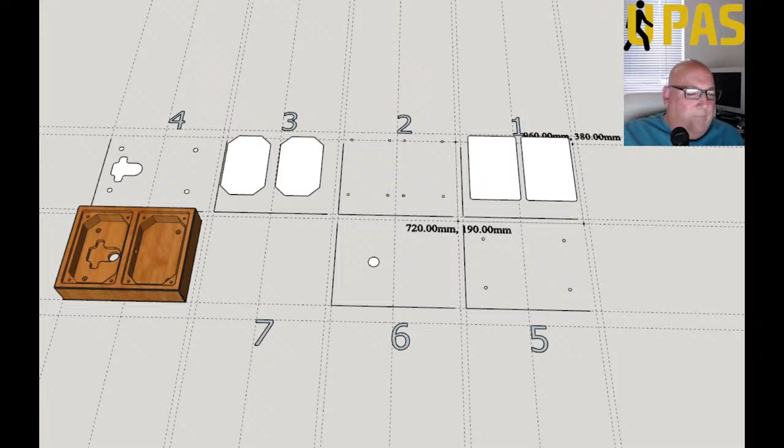Okay, yeah, so what we've got is we've done the cowl. I'll tell you what, let's go back and have a look at the quick cowl. Well, I can show you from here really.

So yeah, yesterday, or was it the day before - I think it was yesterday - I was gonna put a slot across here. I need to get the cables from here to here, so I was gonna put a slot. I did actually model in a slot with a bung. I didn't like it at all, so I've gone back to the other idea. So I've filled it back in, took the bung away, and just put a hole in. So it's just a hole there to send the cables from one to the other.

Didn't want to do it that way, because if I want to lift the lids out to have a look or modify, I can't take the whole thing out without unwiring some or part of it. But that's okay, that doesn't matter. Anyway, so it is what it is.

I got some screws today. What did I do with them? Yeah, a little bag of screws for the lid.

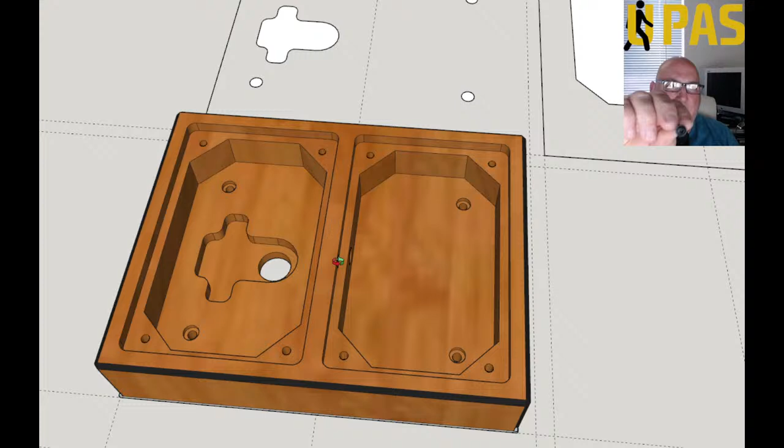Now these are just for the demonstration, the demo units, so I can set them up. They're just basically flathead screws. What it is, because I'm using black anodized aluminium, I think these will be quite nice, and they'll self-tap into the wood.

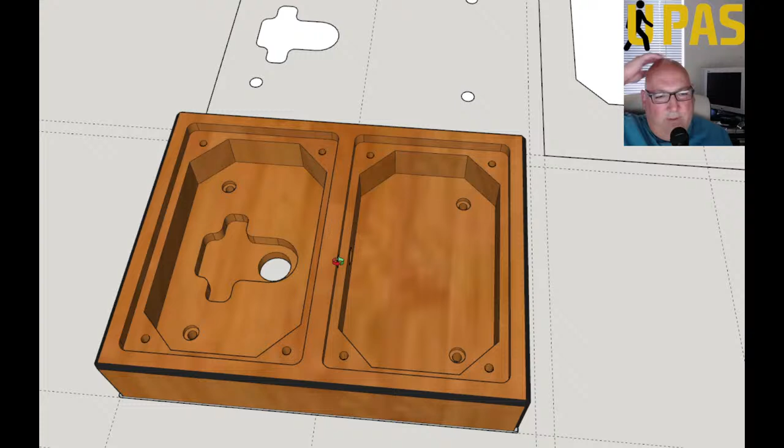So I'm going to use some of them. They're only black japanned, they will rust if they're outside, so it's only for the demo units really. I'll have to sort some better screws out ultimately.

Okay, so anyway, having pondered over it, I decided not to have the slot in there, because I'd have to create the slot, then I'd have to create the bung. It's more work really, a lot more work, and then I'd have to put a bend around here, put an arc around it.

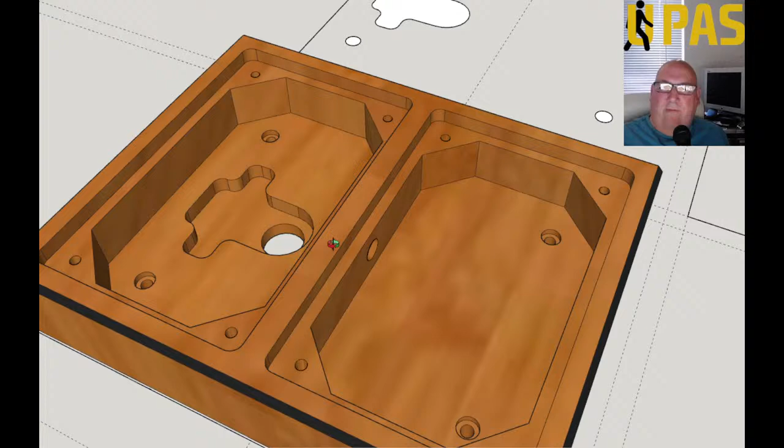Don't want a bevel on it at all, just sand around it, any splintery bits - hopefully there shouldn't be too many splintery bits. We've got to set the speeds for pocketing them out very low.

So what we've got here - don't know whether you used PhlatScript at all in the past. This is SketchUp, but it's got a Ruby module installed, PhlatScript.

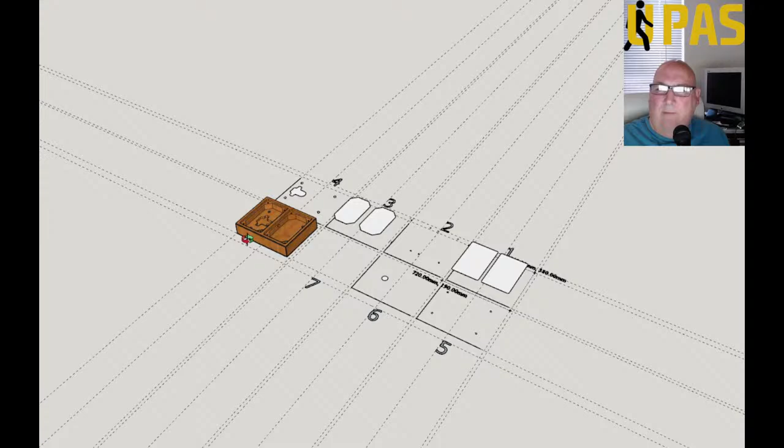So what I'm going to do is, what I've done is I've split up all this code, all these parts. So I started from the top, so basically copied and pasted.

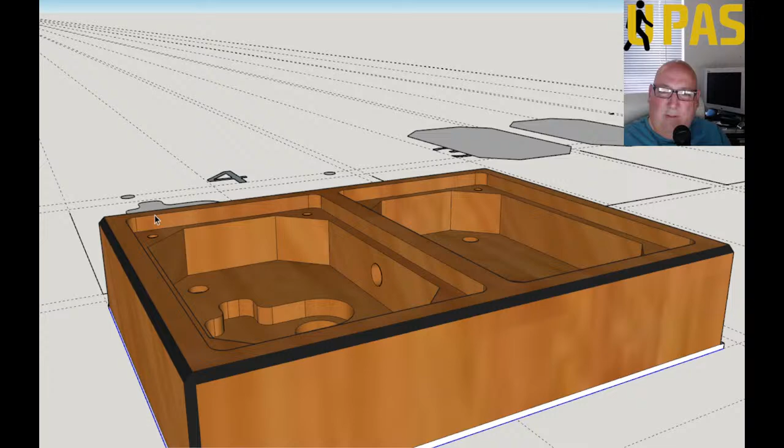So what I'd do is I'd go like this and I'd select, let's draw an extra line just to get it to line up. I need to move it, move the safe distance over with me. You won't know until I've started doing it. So the first thing we'd mill out once this is fastened down would be these pockets - so don't want that. So first select all these little... see, it's not coming out where it goes here. Hang on, there. Okay, there.

So I won't select them all. I'll just check, yeah, so I'll select the one. Normally I'd select that one as well. So then I'll do a copy, and then I'll just do a paste.

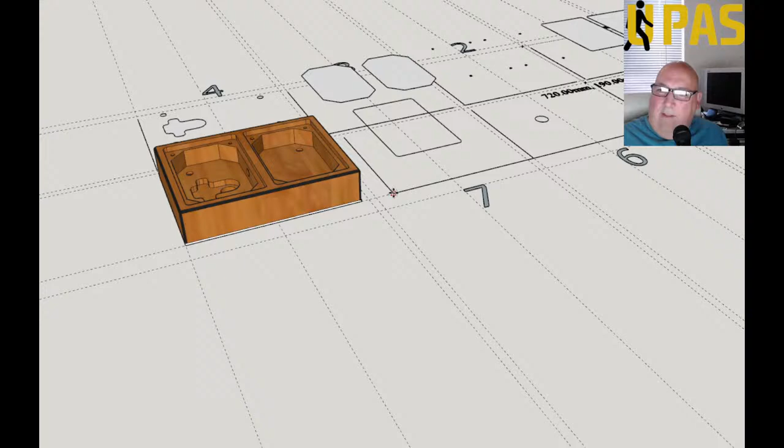Alright, so this is basically... I'd move it around. I could put it there actually. So I'd basically zoom in and I want it to snap to this grid here. See that grid? That's it, I've snapped it to the grid.

I'm not going to use this one. But basically my safe area, at the minute I've selected this one. You can see this has got a frame around it. If I select it again, let me select it again. So you can see that's bringing it in. So if I was to select it across...

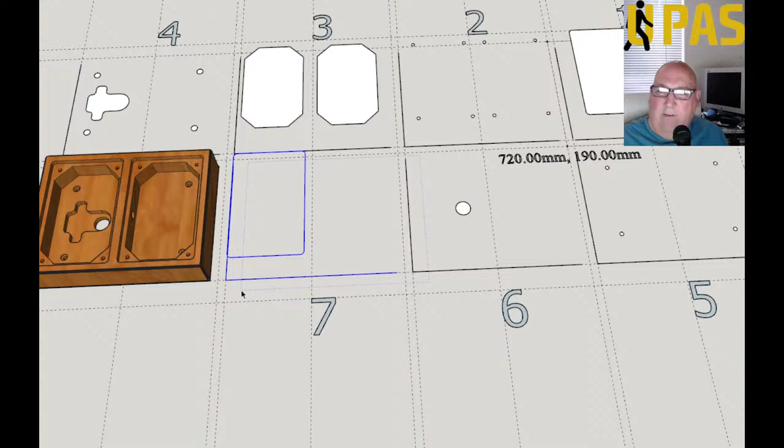What I've done is my origin is 10mm by 10mm. I think I've deleted one of the lines. Let me have a look, it's hard to see it.

Hang on, let's go on to view the axis. So I've already allowed 10mm from there to there. I've come across 10mm and up 10mm.

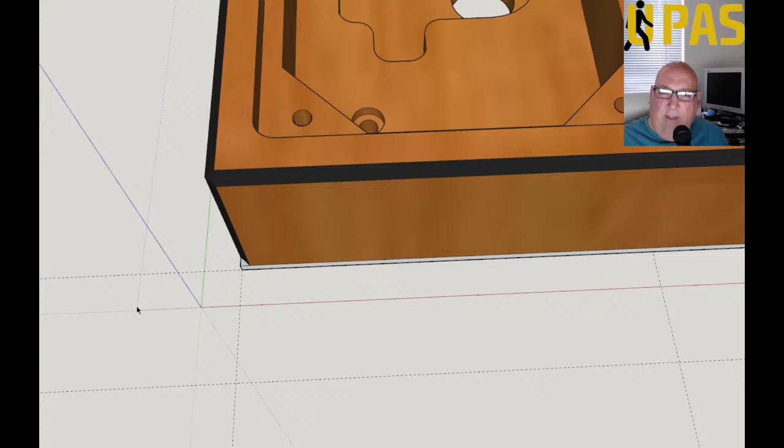Right, so the idea of that is so I can place... yeah, I've got to put... actually, let's stop that a minute.

So what I've got to do is I've lost one of my marker lines. Let's put another one in. So I'll go from there down 10mm to there. Okay, so I put this line in.

So I grab my safe area, this PhlatScript. You need to have a safe area, and it needs to... let me get rid of the axis now. So I want this safe area to start there at that point, 0, 0.

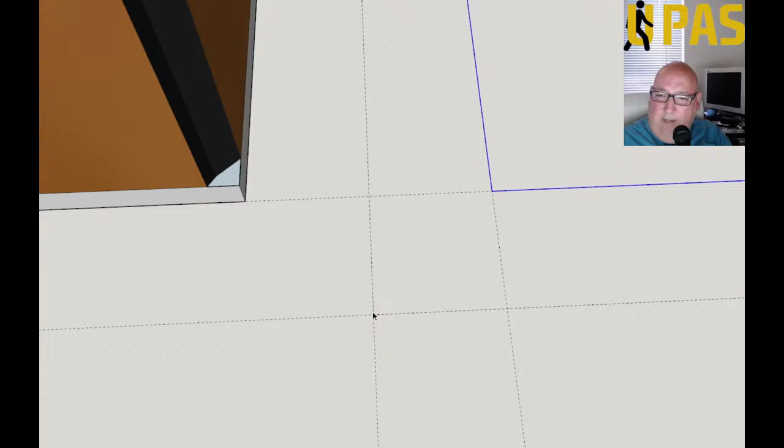Now, so the new safe area is this one here, which goes up to there and across and down. So it's 240 wide by 190 high.

So I need to generate some G code. What we're going to do is I need to fill this. You can't generate a G code otherwise. If I try to put a pocket, get the pocket symbol, and try to put it over it, it's not going to work, it'll go over there. It needs some fill in it, so it won't activate.

So the way I do it is I grab one of the flat bars, delete it, and put it back in again, like that, and you get fill.

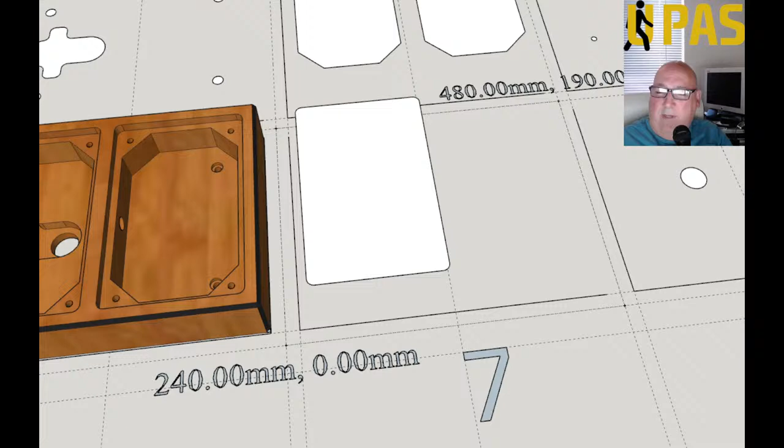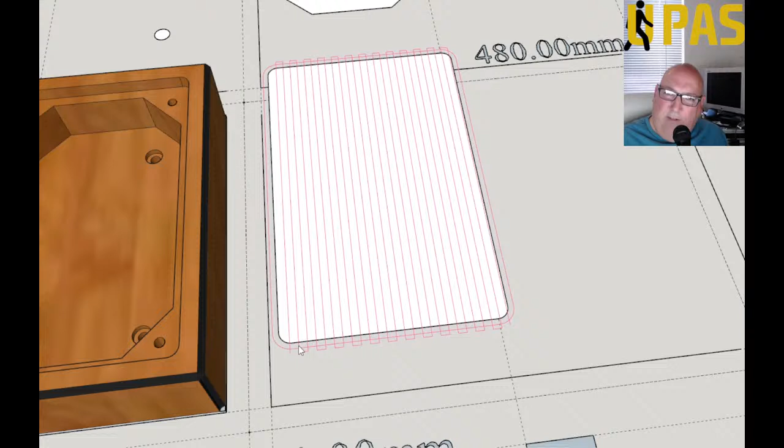Then I go and get my pocket tool, and I don't want that pocket tool - if I was to apply that pocket tool to this, I want to cut the area out inside, but this is the tool path, and what's going to happen is it's going to follow the outside of this path, so it's going to cut this too large.

I don't want the outside bit cutting, so what I'm going to do is cancel that tool, right click on it and reverse the face to get to that one, so I go and get the same tool back again, pocket tool, put it over the top. Now you see it's gone inside now.

So my milling bit is 5mm. So if I click that now, this is the tool path where the G-code is going to start, and it's going to go around like this. I think it's got 70% overlap, and it'll go down and it'll mill this, and it might do more than...

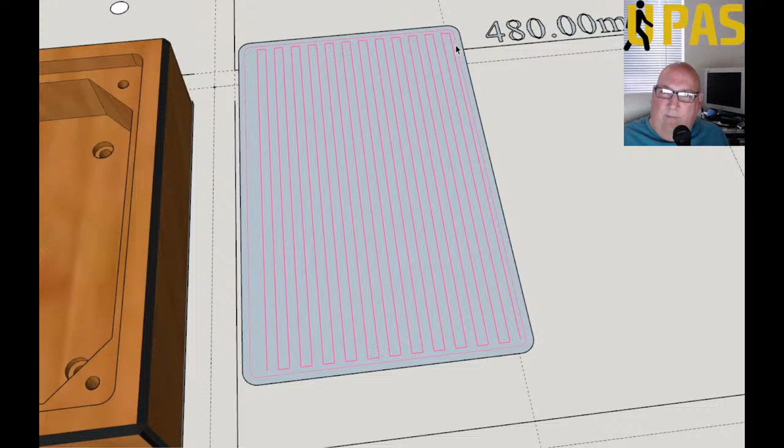What's it called? Hang on, let's have a look what they call it. Multi-pass depth, I've got to generate a multi-pass. I'm going to cut out the wood at 2mm a pass.

I've slowed the plunge rate down, and the spindle speed is set low. I've set the feed rate low, and I've got my bit diameter set to 5mm. Inside outside overcut is 100%. That might be too tight to fit, but we'll see.

I can leave this as it is, but when I generate the polycarbonate, I might need to make that slightly over 100%, so it allows a bit of play. We'll see - the only way you'll really know is when you come to try it, come to fit it into there.

Right, so you've got step over 70%. Okay, so what I've done, I've told it the material thickness is 14mm. Now the reason it's not really 14mm, it's 45mm, but I'm generating the G code for a certain part of it here, and what I'm trying to do is... this is 7mm.

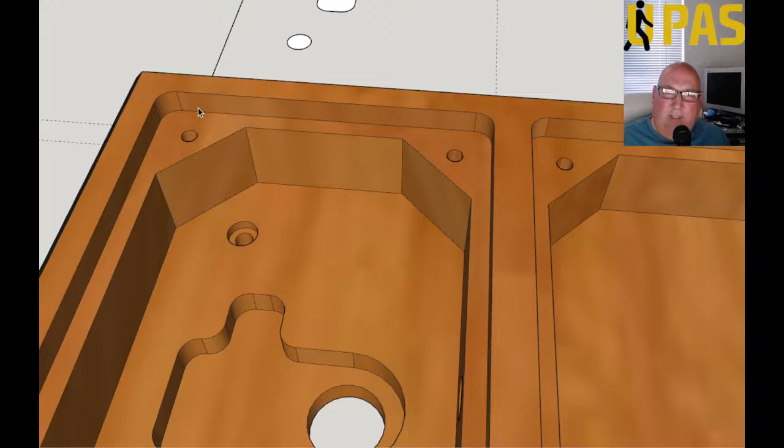If I was to measure that, if I zoom in there, so from there to there it's 7mm. Okay, so I want to mill just this 7mm. So how we do it with this pocket tool, it can't say 7mm, you have to say a percentage of the overall thickness. So I've fooled it into thinking that the material is 14mm thick.

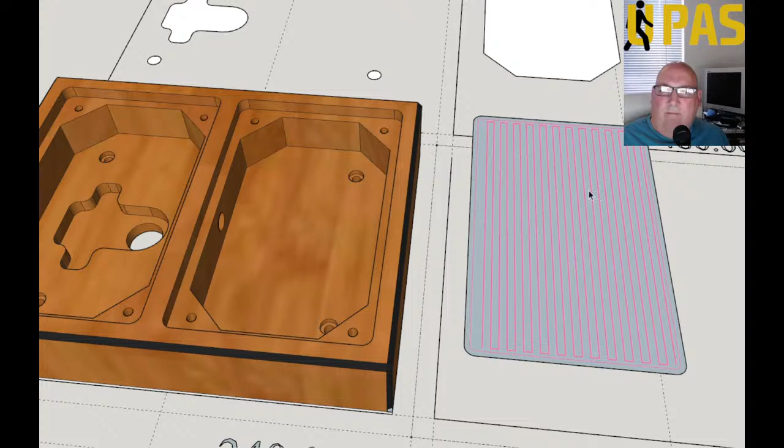So if I do 50% pocket, it should cut half the material, so 7mm. But you won't get it exactly right, I don't think you get it exactly right.

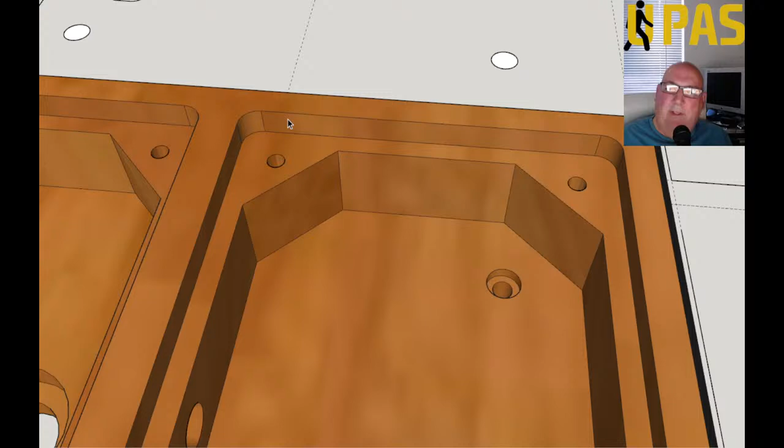It's a bit trial and error. If it's a milli or there, it doesn't matter, it just means put the lid on. If it's gone too deep, the aluminium plate will sit down a bit further. If it didn't pocket it enough, the aluminium plate will be sitting up. So I've allowed an extra 0.8 of a mil on top, basically so I can sand it flush.

Anyway, a lot of this won't make much sense unless you watch the other videos. So we've got this pocket here, and we've got this safe area. I'm going to save it, and I'm going to generate some G-code now.

We're not going to do anything with the G-code, we're just going to generate it. So, here we go. Generate PhlatBoyz G-code, I'm clicking on it. It's going to ask for a file name now, so I'll tell you what I'll call it: test, CNC cloud flattened, and then just test. Okay, here we go.

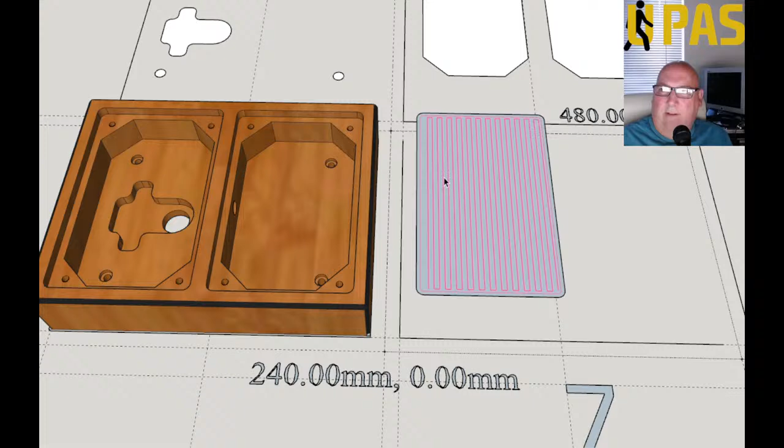So it's outputted a file. Now in a minute it should pop up a plot, it should show me a plot. I told it to show me the plot after. So where is it? Should be here in a minute. Took a while last time to show it. Unless I've unticked it, let me just check. Oh, just as soon as I knew that would happen - as soon as I clicked it, I knew it'd show me.

Right, so you can see that as well, can't you? Yeah, you can see it. Right, so it's good that it's put that there actually. I'm moving it around, but it's staying where it is - clever stuff. Anyway, so this is the tool path.

I'm going to use Mach 3 software on a Chinese CNC 6040, it's the ball screw CNC. I can cut with it something like about 585 millimeters by 395 millimeters. You're supposed to be able to cut 600 by 400, but you can't, because well, you can get close to it, but you've got to watch your stops - you don't drive your mechanism into the physical stop. So when you put limits on and that, you probably find you can't quite get there. But for the majority of the work I do, it's perfectly fine.

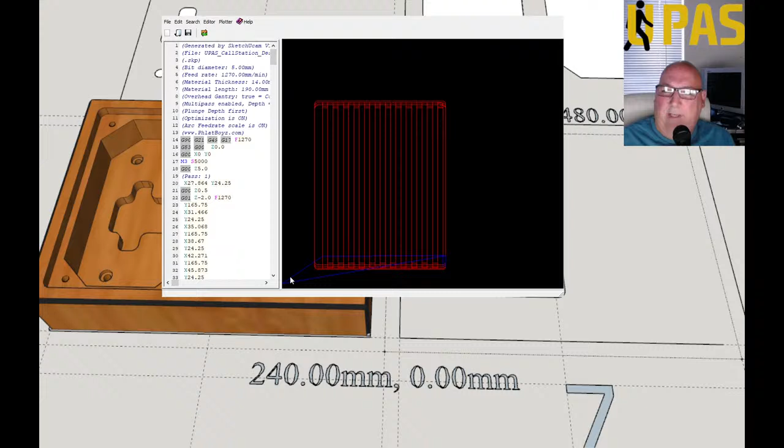So there's your G-code, that's your tool path. So you could save that now. We don't want that one to test, so I'm going to abandon that one.

And so as not to get this confused with the rest of it, I'm going to try and delete that. Can I do an undo? Undo properties, undo. Is it letting me? I don't know what it's doing, is it doing anything? Anyway, it's not really getting rid of it, so I'm going to have to get rid of this manually. So you can sort of tinker around with the toolpath if you want, but I don't really - I let it do the toolpath itself, so I don't want to upset it any.

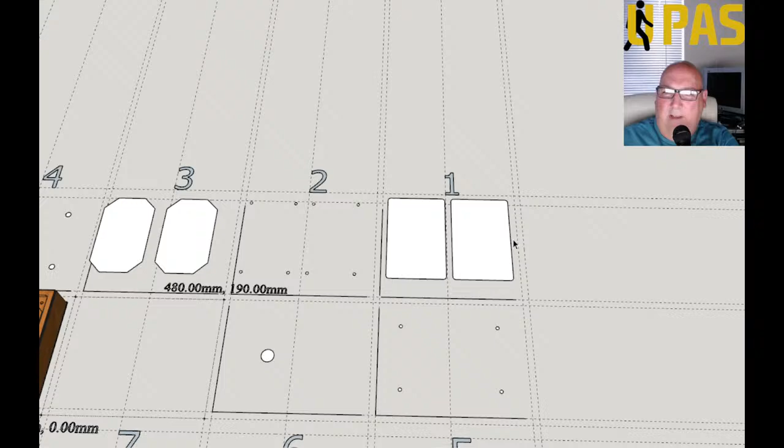Right, so I'm just getting rid of this off here. Okay, now the bits - I've already selected the bits, there they are. I've numbered them 1, 2, 3, 4, 5, 6 and 7. This is how many bits of G-code it's going to create. And you'll wonder how I'm going to line it all up - I'll show you as I do one.

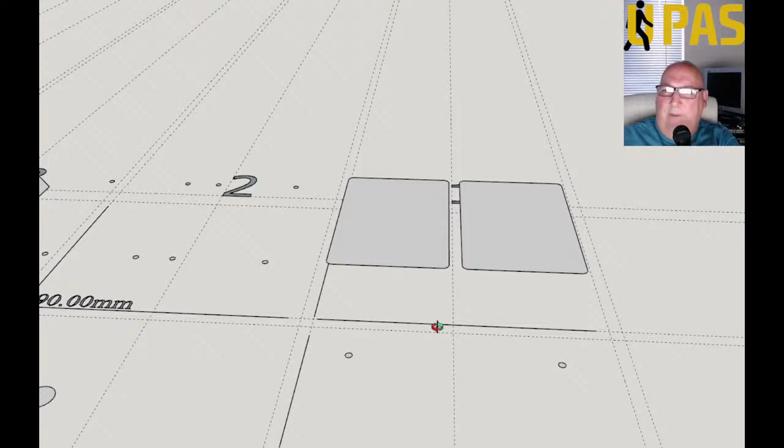Okay, right, so I've left these at the level that I've copied them off, so they're all at the correct level. Doesn't have to be, you can put it flat. So I've already filled these out, so I need to create a pocket. So I go into the pocket tool.

I'm just gonna - again, I've got the wrong way around here. If I did it like that, the tool path would go over the edge and it wouldn't make the exact size I'm after. So I'm gonna have to flip, reverse the faces. This is just the way the PhlatScript does it - if you want to go inside pocket, you have to reverse the face. I'll do that one, I'll do that one.

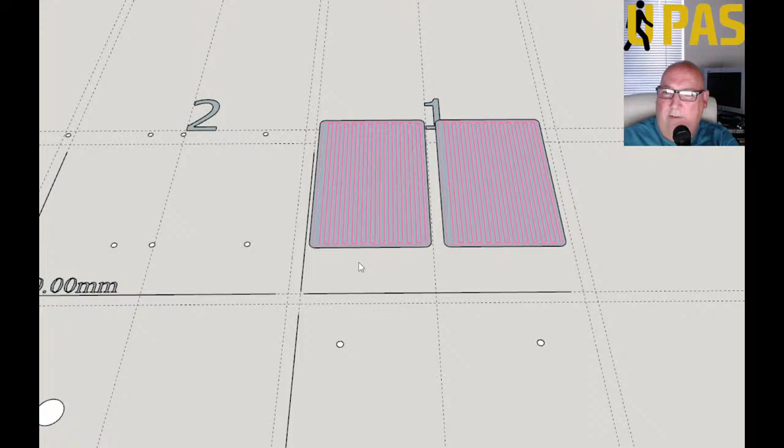Okay, now that, in effect, is ready for creating the G-code. Now, if I was to click generate G-code now, you wouldn't see nothing because my safe area is here - you've got to move the safe area over there. So I pick up my safe area again, and I've got this area. You can predefine the area, and I've predefined it to match what we got here. So I need to come down here again, yeah, so I need to snap into there. Okay, so that's my safe area.

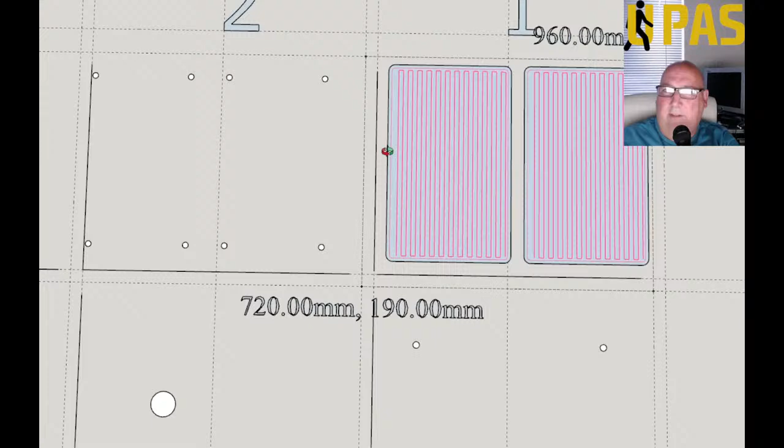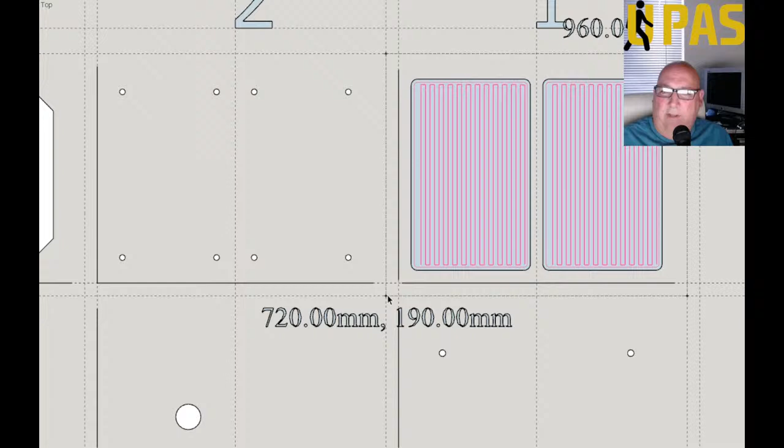Now if you go up above it, sometimes you better have to take it off parallel projection, probably - take it off perspective and go parallel, it's better, then stand above it. That's it. Okay, so when I generate my G-code now, this is the 00 point. Go on, that's the 00 point, and it goes 720 across and 190 up. But you can see these are all weird numbers now.

I'm not quite sure what's going to happen because this PhlatScript has changed since I used it a few years ago. They've added some extra features. I'm sure it used to be the same no matter where you put it, but I think it's referencing your table bed now, or your zero point from over here.

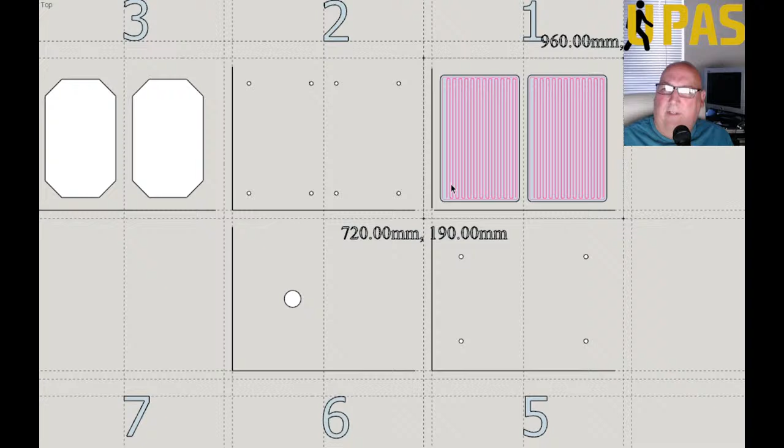The 190 is right, so that's the height. But 720 is not right. Or is it saying 720 to 1? I don't know what it's saying. Anyway, we'll try to work it out.

So let's see if we can generate a G code for that. I'm going to click on generate the G code and ask for a file name. I'm going to put G code and then number 1, indicating that's the first cut. So if you want to load the file back, you don't have to go to the SketchUp, you can just load it back and do another one. Alright, so I'm going to save that.

And hopefully it'll pop up the plot as well, show me the plot. Just gotta wait, when it shows the plot, it eventually shows it. And then we can have a look if it looks something like what we're expecting.

Good evening, hi all. Good evening all. I talk to myself, don't I?

Anyway, right, so no G code, no plot yet. As soon as I move the mouse and click, I'll go on to this. Yeah, as soon as I do that, it appears. That's weird, unless it's put it behind. Maybe it put it behind.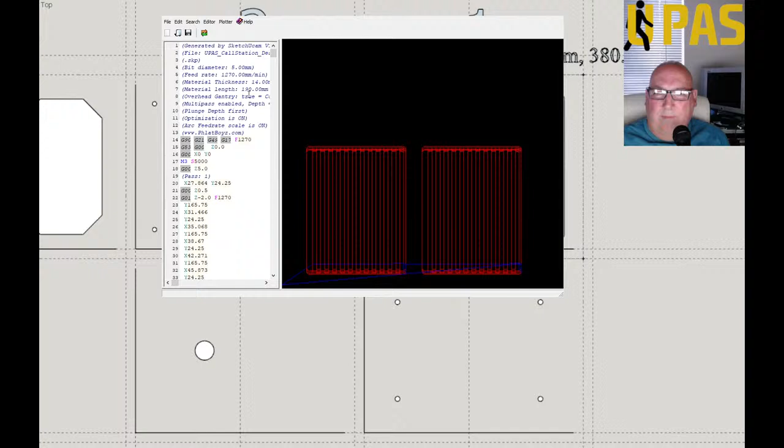Hang on. So thickness is 14mm, yeah, that's what I wanted. 5mm bit diameter. Now I don't know if it is 5mm yet, it could be 4.5. I'm hoping it's 5mm. I tried to test it, but I haven't got a battery in my caliper, so I'm having to try to read it. I can't see what's written on the side of the tool.

Multipass depth 2mm. So it'll tell you a number of passes as well, or it might not, so let's have a look. So pass 1, you can scroll down here and you can see how many passes. Go back, oh what am I doing, going up here. Pass 4. So it's going to be four passes.

So basically the tool, the CNC is going to make the tool go around this, this time 4 times. It's going to cut it at 2mm depth.

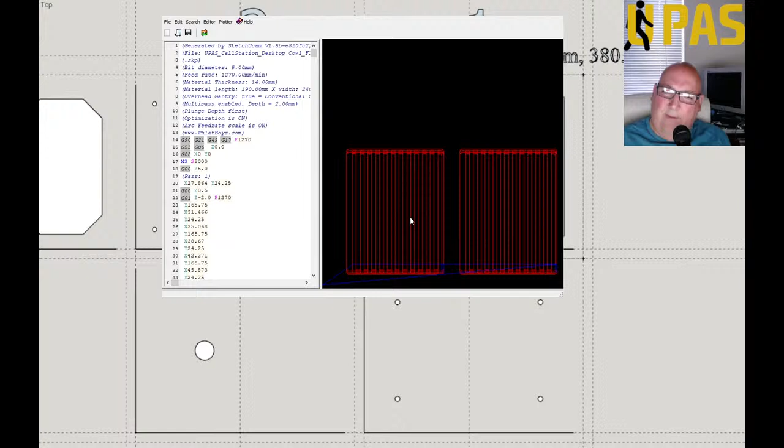So what I've got to do is put the wood in the CNC on the bed as flat as I can. I'll put a bit in. I go to this corner. Can I make this bigger? Yeah, let's probably just leave it like that.

Right, so what I'll do is I'll zero it out. I've got to put my material, put my bit wherever I want on the bed, 0,0, zero it all out. And bring down the Z direction on top of it, just so it touches the material, non-spinning.

And see if I can get a paper between it. Slide a paper in and out. Then come over to this side and do the same again.

If I find that it's not the same height somewhere, or in fact the wood could be warped slightly, it might be beneficial to face off the wood first. So send the tool path across the whole piece of the wood, and that'll sort of flatten it. Well, it's cheating a bit though, ideally you don't want to be doing that, but it's more work for it to do, basically.

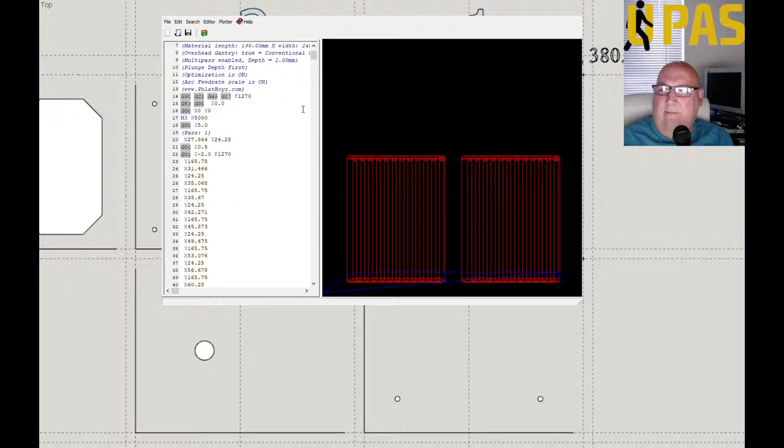Yeah, so anyway, it seemed to have worked. So we'll close that down. That seems to work, so I'm going to save that.

So once I've done the 2 pockets, which is these two areas here, if I go on, hang on, let's go back on perspective. If I angle it, you'll see the way I do, I go from top to bottom. So do the pockets, and the next one's to do with these holes here. Now I don't necessarily want to do these holes.

I do, but because I'm using those self-tapping screws I showed you, I just need to drill a pilot. But the bit I got in there will be 5mm. I don't want to swap the bit out, so what I'm probably going to do is just leave these holes for now. Leave them. Now I could swap the bit over. Yeah, I could do that. Or on these prototypes, I'll probably just drill them with a drill.

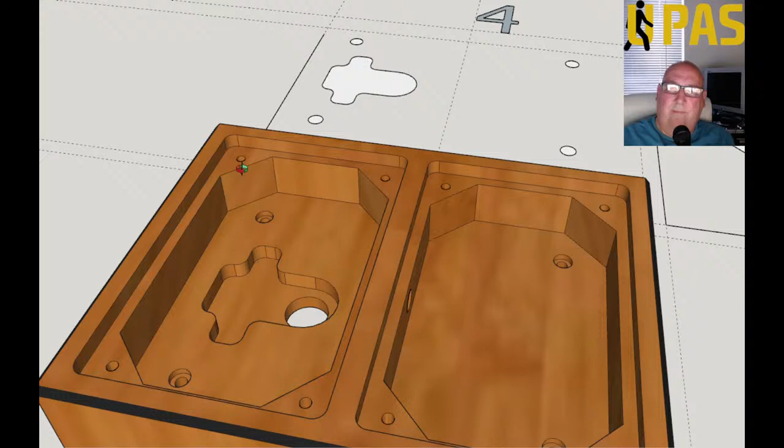I don't need to drill a lot, I just need a very thin drill to act as a pilot. So I'm probably not going to do those holes. When I put the lid on, I'll have a template to use to get it positioned. Unless I just merely... I'll tell you what I'll do.

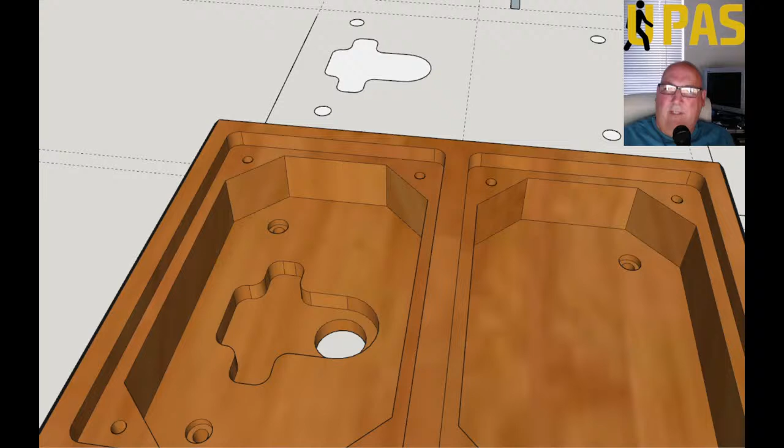So I get the right position. I won't do a plunge. Yeah, it needs to be a plunge, doesn't it? Yeah, I have to do a plunge, but I'll just go in a couple of mil, or a millimeter, just so they're all marked up ready for tapping. Yeah, I'll do that. Probably best to do that. Save me trying to line them up and that.

So let it do some work. Let's do that then. So the next ones are these. You've got 1, 2, 3, 4, 5, 6, 7, 8 holes, and there they are. I've already filled them in as well.

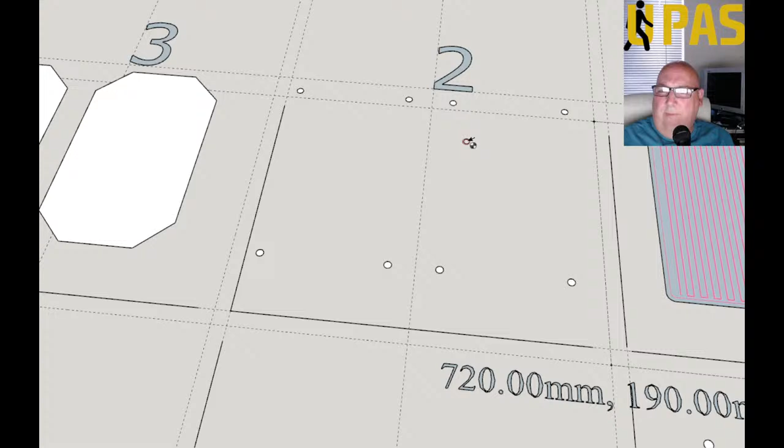So I need to use the plunge tool. Let me just click on it. You can't see it off the screen. It looks the same as that. And it says the plunge depth, it's a percent again, so I can...

So I think these holes were going to be something like 10mm deep. So what I'd have to do is go over to my Phlatscript. I'm just going to change the material thickness to 10mm, I'm going to pretend it's 10mm.

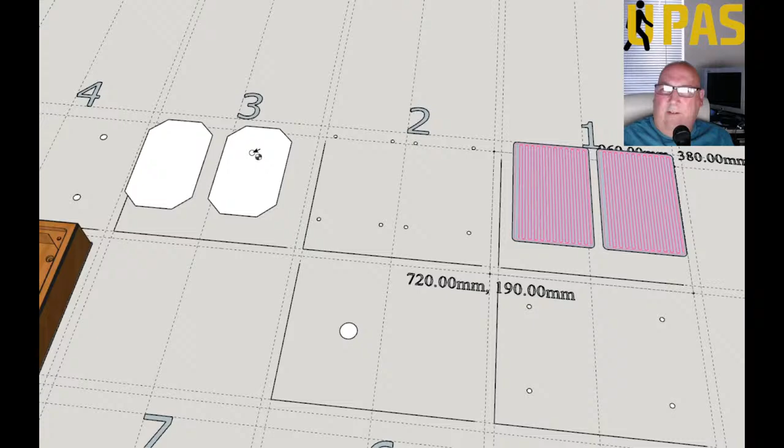Now I will have to zero. I don't really want to do it that way, do I? I've got to be a bit careful here, because I'll go back to the model. I'll be a bit careful.

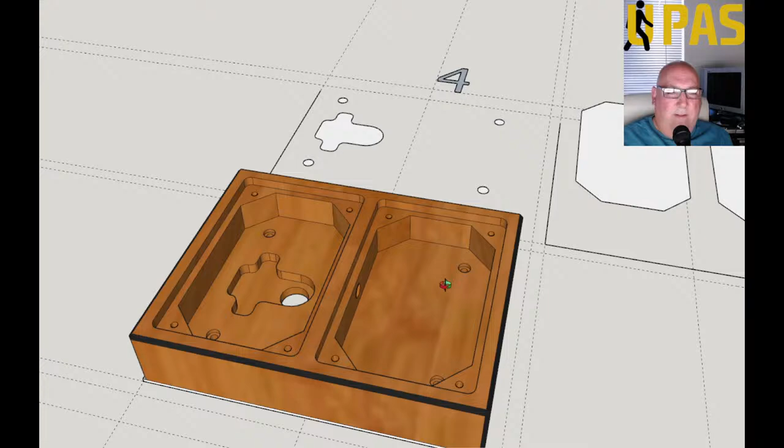So I've got one lot of G code to pocket these two, which I've already created just now. And I'm going to need another G code.

Now if I say, yeah, I want to plunge the drill down 10mm there from that face, I would have to zero the bit, the spindle, bring it over to this shoulder and zero it there. I don't want to keep zeroing it if I can help it. That's not what I want to do. Because if I zero it there and it tries to go back home once it's finished milling, it's going to smash straight across there.

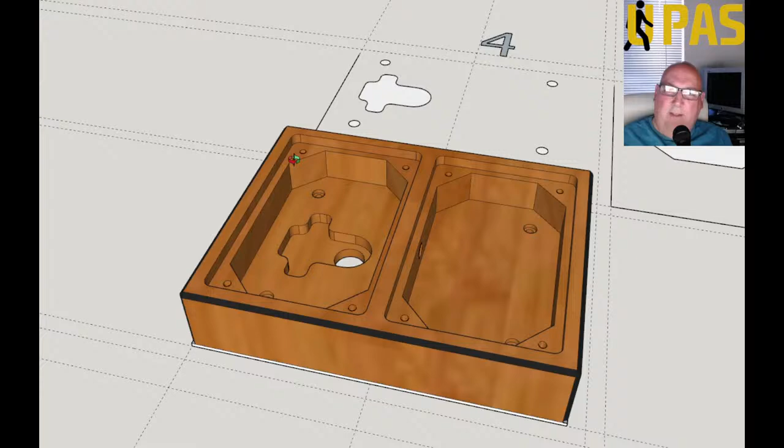Because its safe distance is 5mm up, and that's 7mm, so it's going to come and rip the piece of material across. So that's another reason I didn't want to swap drill bits, because I have to re-zero it. Once you've zeroed it, you don't want to keep swapping if you can help it.

So what I'm going to do is include that 7mm in with the thickness of this. And we know it already thinks it's 14mm thick. You've got 7mm, and I'll pocket it 7mm. So I only want a little bit of an indent. I don't actually want to plunge that 7mm, I'll never get the screw to tap into it once I've opened it up to 5mm diameter. So what I'll do is get it to plunge, say that's half, 50%. I'll just go a little bit more, so if I say 55% or 60%, let's say 60%.

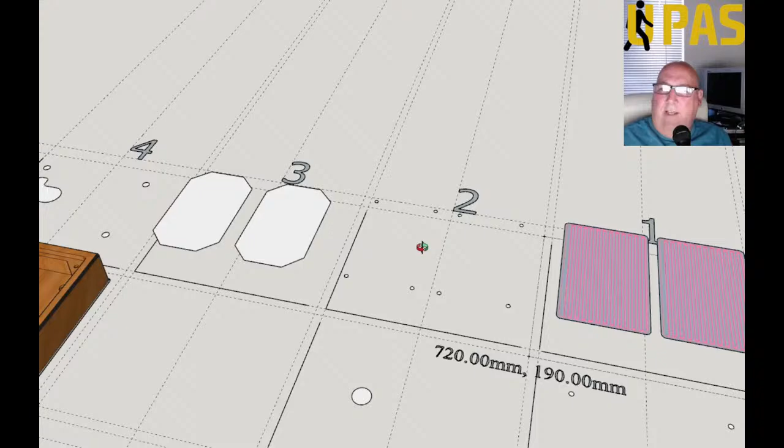Okay, so I'll go back over to here now. I'm going to keep the material thickness the same, and I'm going to plunge 60%. So I'll get my plunge tool, go onto there, and I'm going to type in 60%. Alright, and I'm going to click in there, and it's going to tell me...

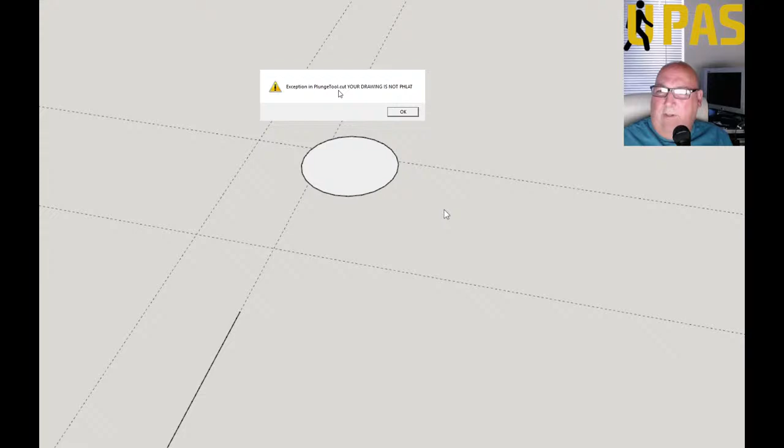Cut, your drawing is not PHLAT. Exception in PlungeTool.cut. Your drawing is not PHLAT. Yeah, okay, so let's just try reversing the face and do the plunge again, 60%. No, exception, your drawing is not PHLAT. Okay.

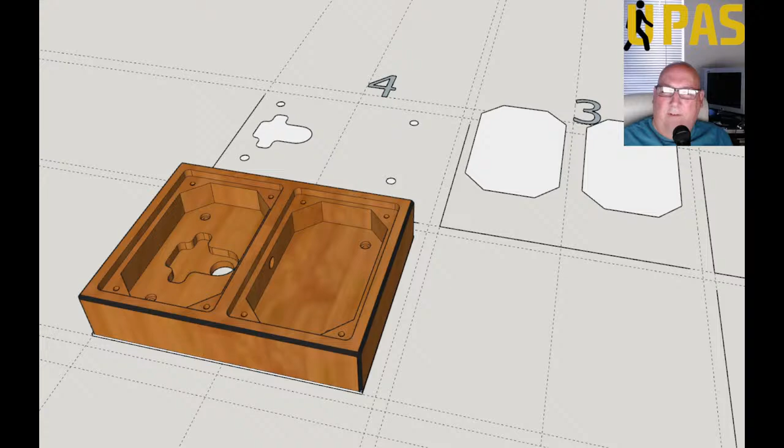Yeah, so what I might have to do here, I might have to do something here. I think I know what it is. It doesn't like to plunge inside that hole on its own. So what I'm going to have to do... how am I going to do that? Yeah, I need to include some of this material here. Yeah, let's try that then. So I haven't got enough of the model.

So let's clear this up first, let's get rid of them. Get rid of that, get rid of that, that. Get rid of that, so get rid of that. And that. Right, so what I'm going to do now is go back over here.

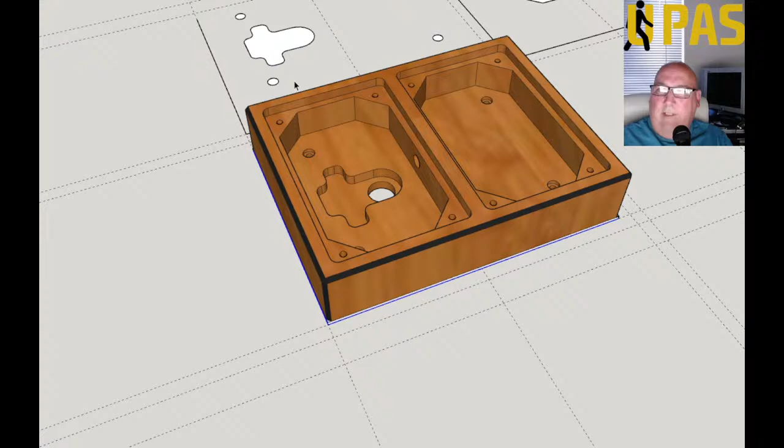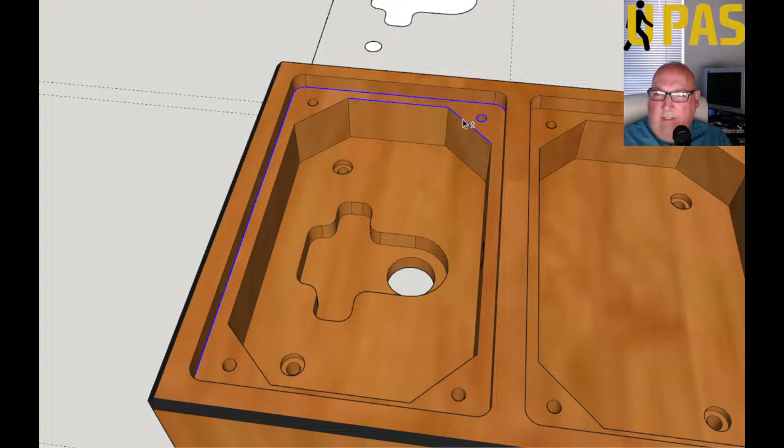Go back over here. I need to select my outer marker. So I want that one and that one. Yeah, I need to select all that really. Let's have a look. I need that, that, and that, and that. Do I need all that? No, don't need that at the minute. But I need all of this.

There's probably tools that'll do it all for you, like the Fusion 360s and that, it'll do everything for you, but I don't want to. Once I've done generate the code, I'll have it and I'll just reuse the G code that's done. So let's get the next one, just in case.

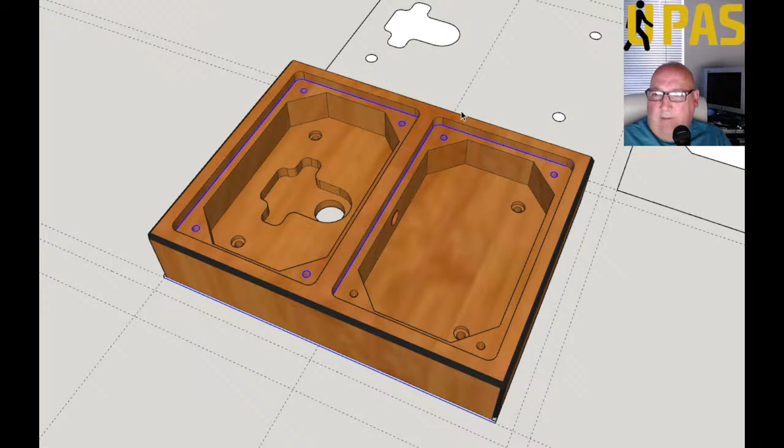I'll need that, I need that and that, and this one, that one, that one, that one. Okay, let's go, keep going. Don't need that, need that, that. Right, okay, there, one more. That's it, these two.

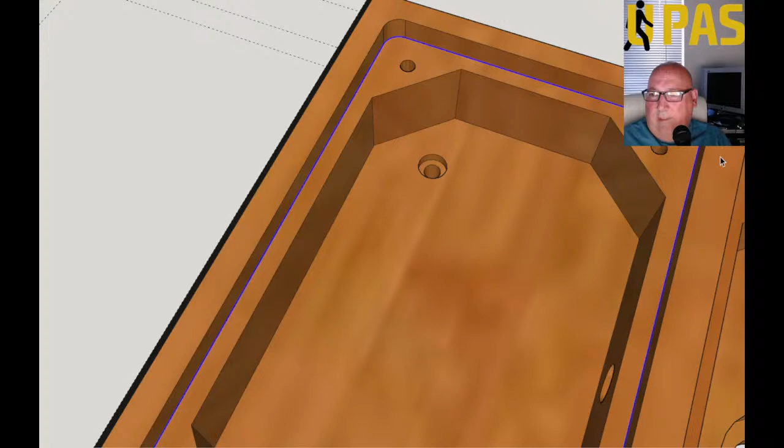Okay, let's just turn it around. So we've got them now. We've got the lines, so we'll do a copy. Copy. Now we need to paste it over here, so paste. Alright. Paste. So we've got that now.

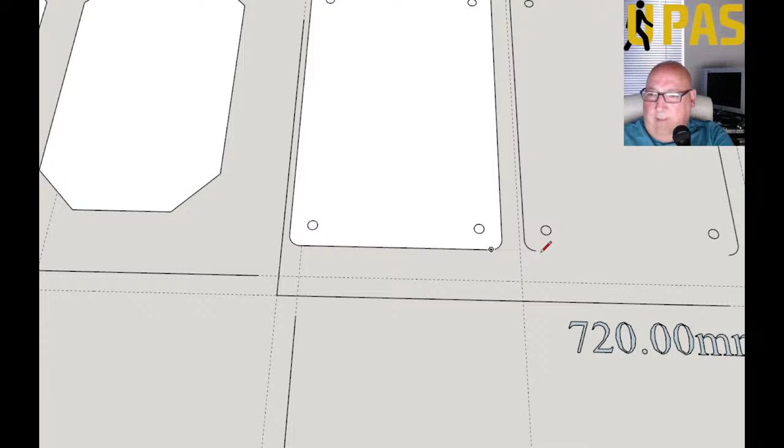I need to make it filled. So let's take that off, take that off. Put that in its place. And this one. Okay, so we've got them.

Now, will it let me plunge? Okay, let's try again. Alright, so let's just save that. I don't want all this area at the minute, but I just need it to get to plunge. Exception, so 60%.

It's not flat. What's not flat? Oh, I see, it's not intersected. I've got to intersect that. I should be able to select, if it's right, I should be able to select that in a bit, but no. So I need to just select.

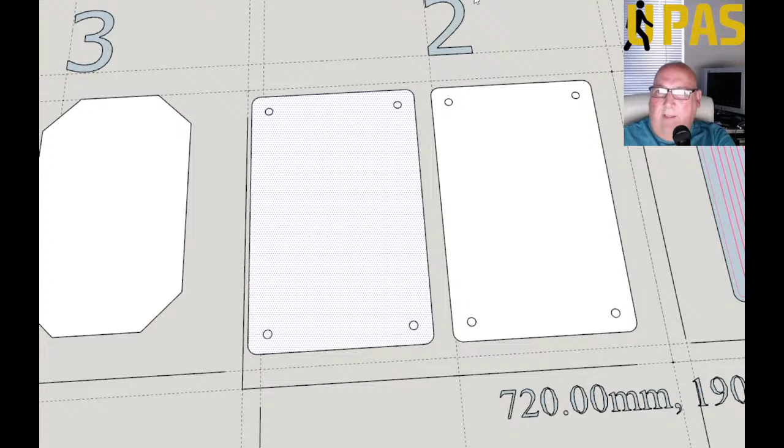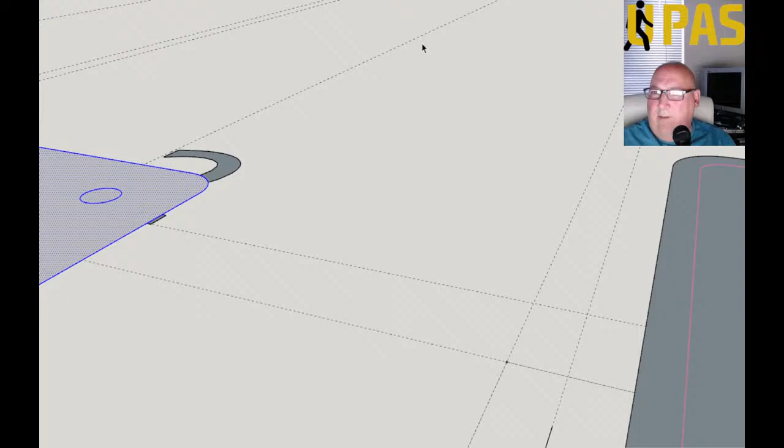What I'm going to do is select the- it's hard to do. Yeah, I can do that way. That's it, right, I'm going to select these like that. And I don't want that corner there. It's the trouble when you've got the models close together, you end up selecting stuff you don't want. Causes havoc if you've got stuff you don't want selected, right?

Oh dear, it's playing up now. Right, here you go, so it's awkward trying to manipulate this. So I need to do an intersect. Right click, intersect faces with selection. Right, okay, so now I should be able to, yeah. Should be able to do that now. It shouldn't complain now, so I bring this down, I go 60%.

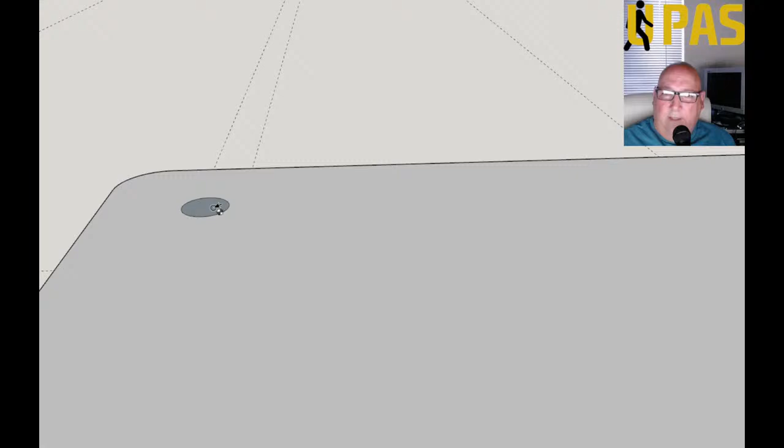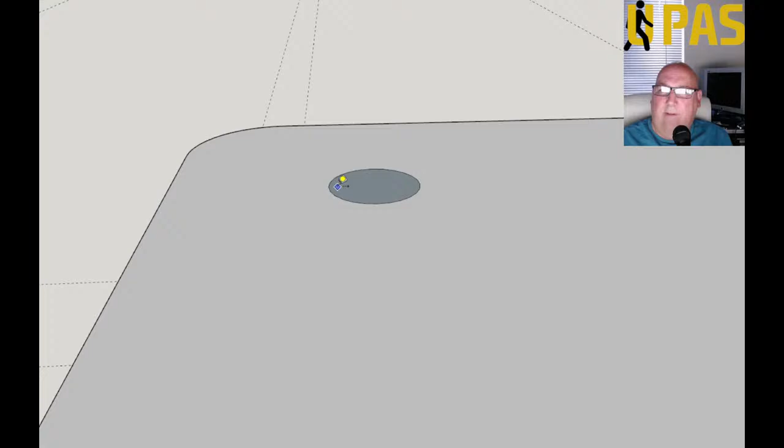Your drawing is not flat. Didn't mention anything about being flat when I did the other bits, did I? Oh, I'll tell you what, I know what it is now. I know what it is. My bit is 5mm, and this is 4.5mm. This is- that's the problem. If I measure it, it's 4.5mm. Yeah, you can't drill a 5mm hole into 4.5mm.

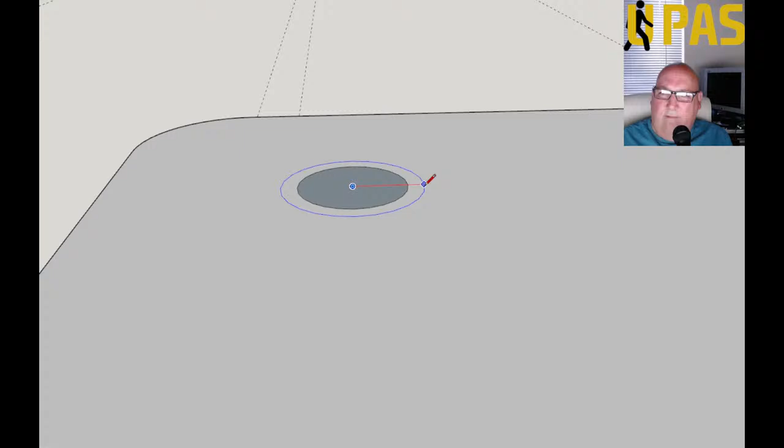So the easiest way to get around this for now is literally just to expand it, or put another hole over top. So let's do it. So it needs to be, it's 5mm, it needs to be- let's try 2.6. 2.6mm, I'll get rid of that one there.

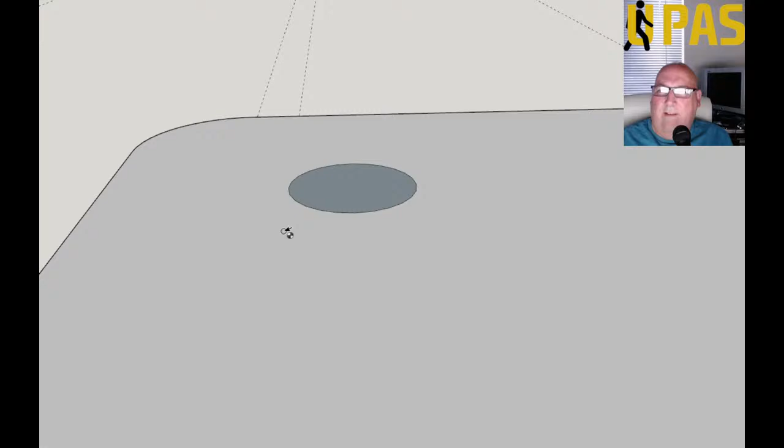I should be able to do the plunge now. 60%. Oh, still saying it's not flat. Why is that? Okay, reverse the face, try again, 60%. Huh, it's not having it. Your drawing is not flat. It is the plunge tool, isn't it?

So all that just to pilot a hole for you. Yeah, it's crazy, I've got to be able to- what? I don't get it, what do you mean it's not flat? Okay, let's try something else, let's flip this one. Let's flip that one and let's try it again.

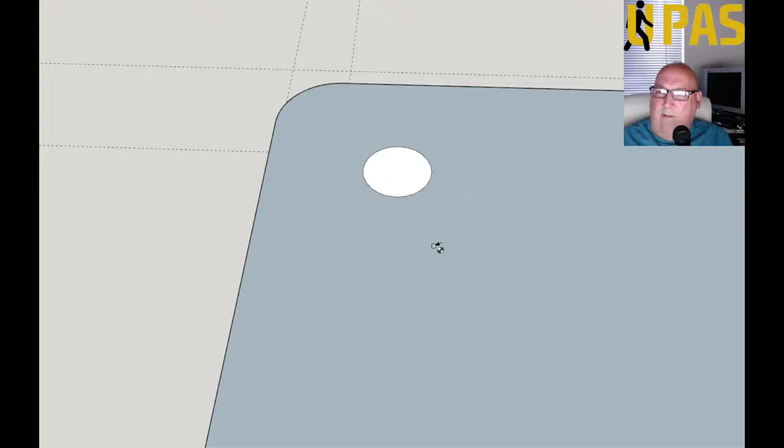60%. No. Okay, let's flip that one and try again. 60%. No, that's a bit of a silly thing, isn't it? Okay, let's have a wide one.

Let's have a wide one, bigger. And 100%. No, it's not having it at all, is it? Okay, don't know what's going on with that. Question mark, help. It's not showing you this, is it?

Plunge tool. Where are you? Plunge a hole. This tool is used to create a plunge point at any given cursor position. The use of the plunge tool is to drill holes. The plunge tool creates a circle with a red radius line extending from the center of the outside diameter. The diameter of the circle is determined by the Phlatboyz bit diameter. The plunge tool allows generation of G-code required to plunge the bit depth.

Maybe it doesn't like it because there's already one there then. So, okay.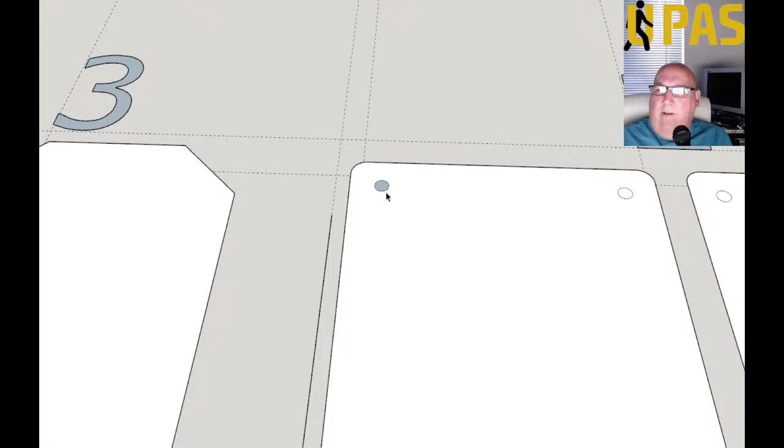So what I'll do - get rid of that, undo the circle, undo, undo, undo, undo, erase, undo circle, undo, right, okay. So let's flip that back to where it was.

So we don't want this, we want some coordinates instead. So what have we got here? 10 mil by 10 mil. Okay, let's do it - 10 mil and 10 mil.

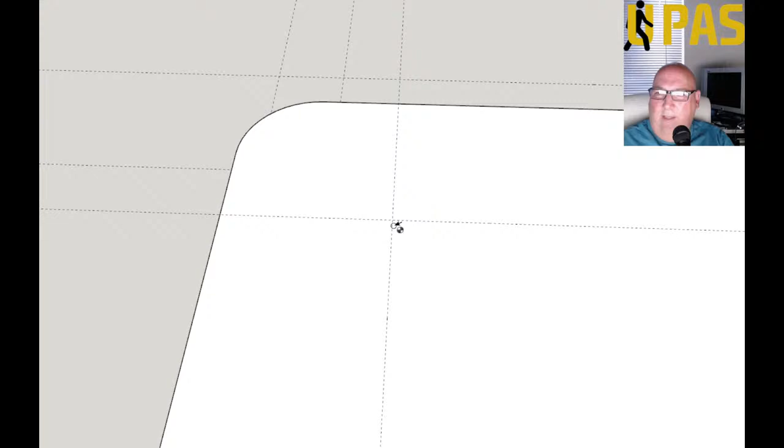And let's get rid of that off the system. Let's do a plunge, 60%. It's not going to line up with anything. No, still won't let me do it. Okay, it's saying it's not flat, so shall we take it literally? We'll take it literally. So undo, undo, undo, undo.

Okay, take off these. I tell you what, we'll move on. We'll leave the holes. That's a bit of a fail. I don't know, I can drill them by hand, but I don't really want to, but I'll have to. Right, so go on to the next ones.

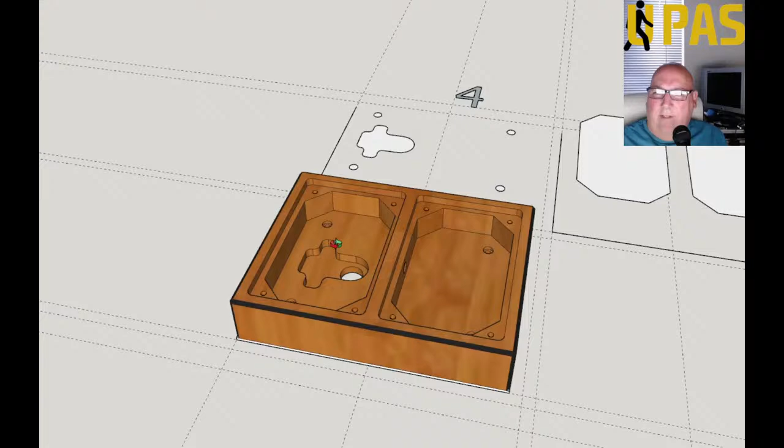Now these need to - we'll miss stage 2 - these need to be 23 mil deep. I do. Alright, oh yeah, that's alright. That's alright, yeah, it looks good. Okay, alright. That's good.

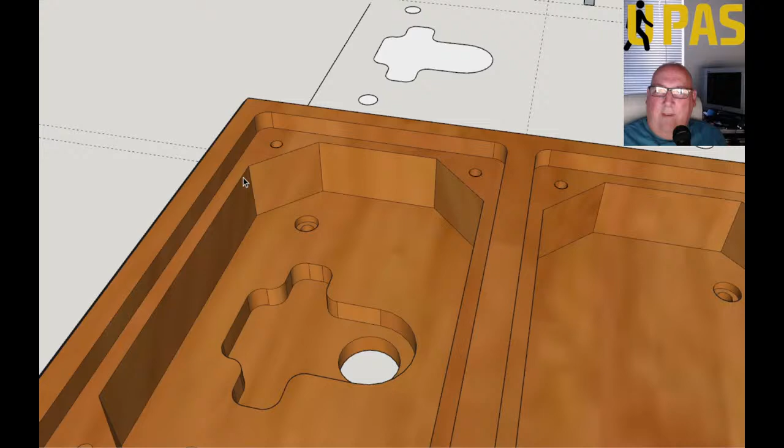Right, so let's measure this, so 23 mil. So we need to - yeah, so I'm going to pretend this is still here, so 30 mil. Yeah, so let's do it for 30 mil. So we don't want to plunge this time, we want to pocket. So let's - we know what we've got to do. We've got to flip them around. Flip them around, and we go to the pocket tool.

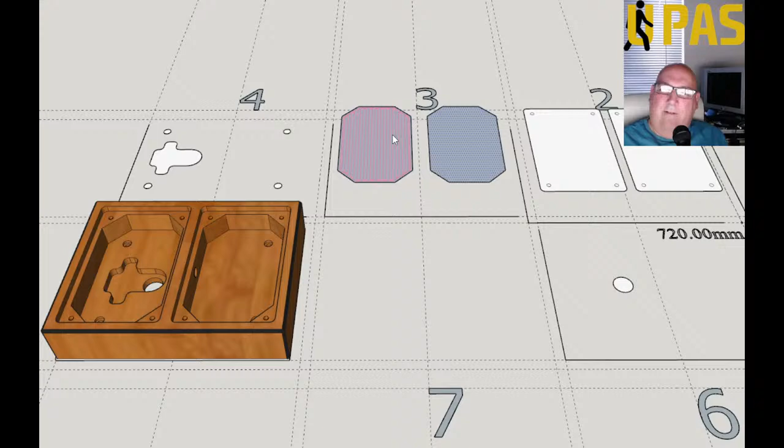And no, I can't do mill. This might not be the right tool for this job. So I'm gonna resort to some calculations here. Percent of depth though, so it still thinks - this is turning out to be a bit of a nightmare.

So I've got one file, I've got to keep changing the depth. So 30mm is what this one needs to be. Or there is a 3D option.

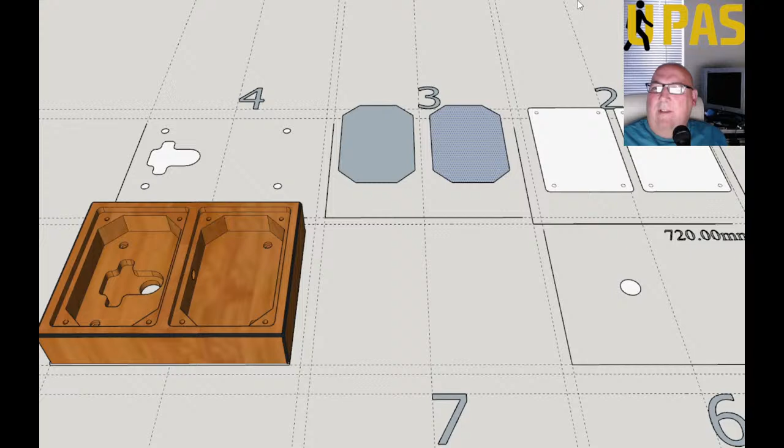Generate 3D G code - generate a 3D cut path over a 3D object. Yeah, it's got - did it say there we're still working on that bit, so I don't think I'll use that. So I've got to work out, if I want 23mm, the percentage of this 45mm. It's getting a bit awkward, isn't it? Why does everything have to be difficult?

That's going to be a problem. So I've got no control. How can I just do it? Why can't I just tell it how many mil I want to do for the pocket?

Sure, did it - if I pretend I'm cutting it. Yeah, I can cut it. God, probably using the wrong tool here, really.

And then you've got your material thickness and bit diameter. Then it starts talking about plunge rate. It's talking about depth in a percentage.

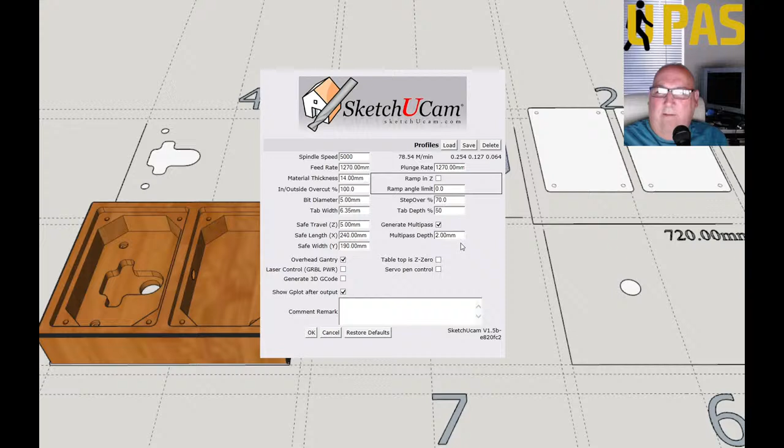Percentage of the material. It's okay if you just want it off, but I want to do that at 7, and this is 23. So, how accurate is doing it by percentage?

So it's an overhead gantry. So I zero out on the top, and I just need to come down 30mm ultimately and mill this out. Route it out at 30mm to depth.

Trial and error. I suppose I could mill a piece of scrap wood and see how far it goes and change the percentage. That seems a bit long-winded, doesn't it? Anyway,

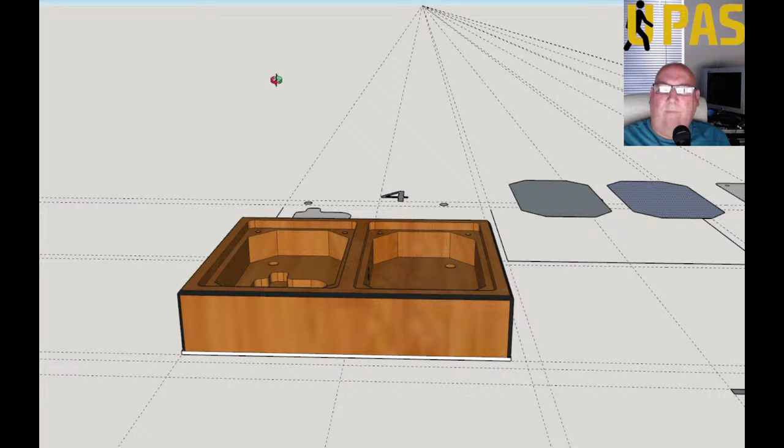I'll have to have a scout. So I'm used to - they have changed this code. They've changed it a bit, haven't they? Anyway, let's get back to the model. Let's just save that for now.

We have to work this out. I'll do a bit of googling and find out what other people do with it. Okay, back to the call station.

Yeah, so yesterday I put this slit in there. Got rid of it now. Back again. Right, so we don't want to see that again. So let's get rid of that. What should we do then? Not a lot. Right. Yeah, so bit of a disaster.

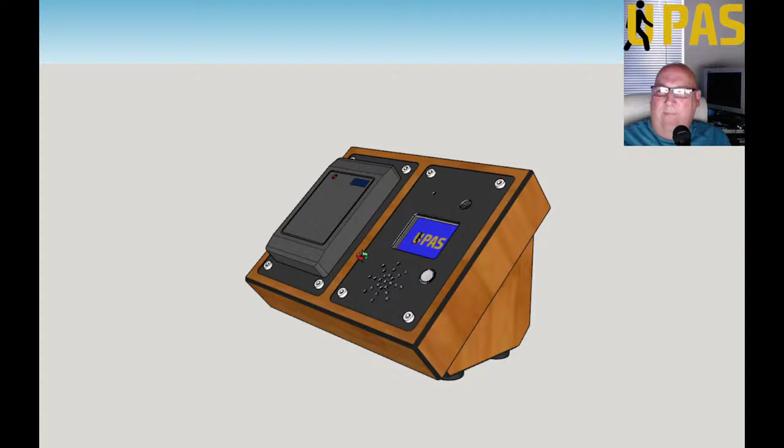So if I cut a hole straight through, all I've got to do is - yeah, it's inside, outside, overcut. What else? What tools have we got? A tab tool, fold tool, plunge, countersink tool, counterbore tool. Go on, center line, pocket, and erase.

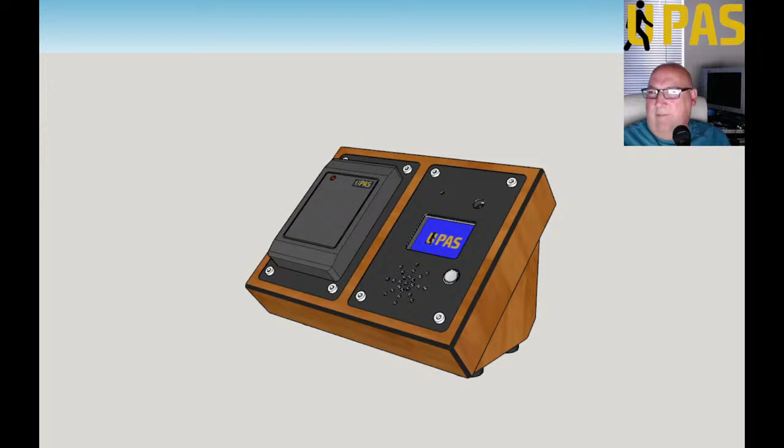Oh well. Right, I'm gonna leave it there, I think. Yeah, we'll just leave it there. So some of these videos are fails, basically. Right, I'll end it there, and I'll have to do some more research.

Maybe I'll have to get another SketchUp plugin, one that works a bit better. I'll do some googling. Okay.